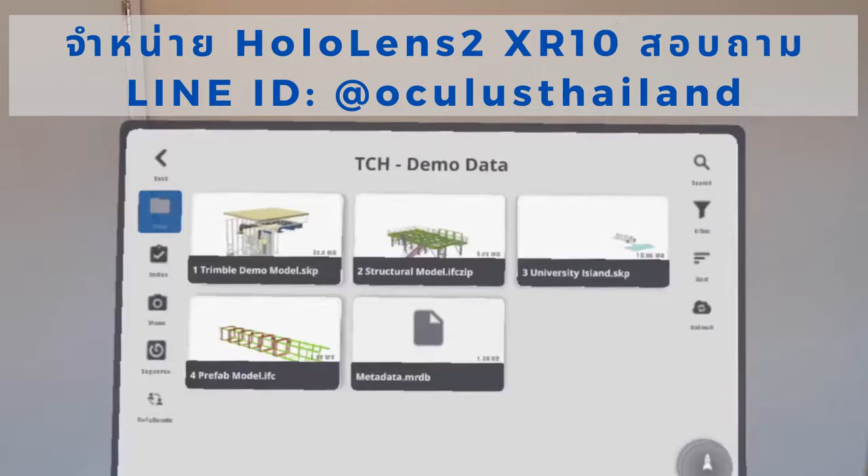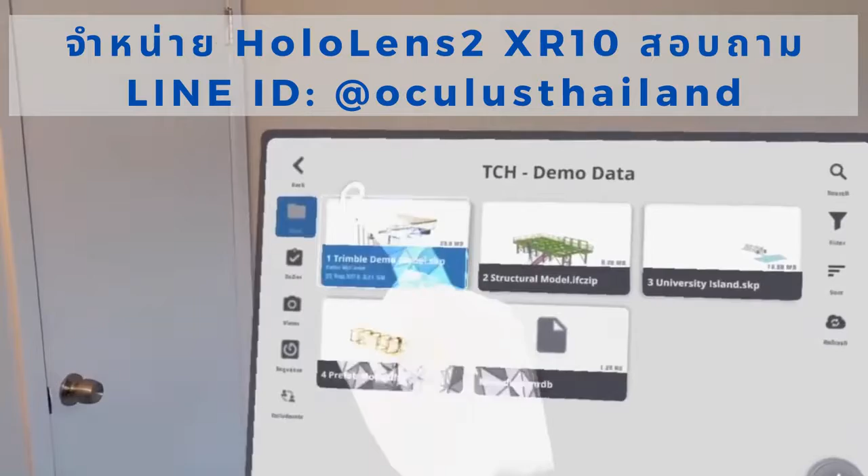Alright, so today I'm going to take a few minutes and demonstrate the Trimble XR10 headset utilizing Trimble Connect for HoloLens. To start out, within Trimble Connect, we'll select our model and launch it.

The first thing the headset will ask us to do is spatially map our surroundings, getting a good look at the walls, the floor, and the ceiling where we're standing. Then we air tap to anchor the model wherever we'd like.

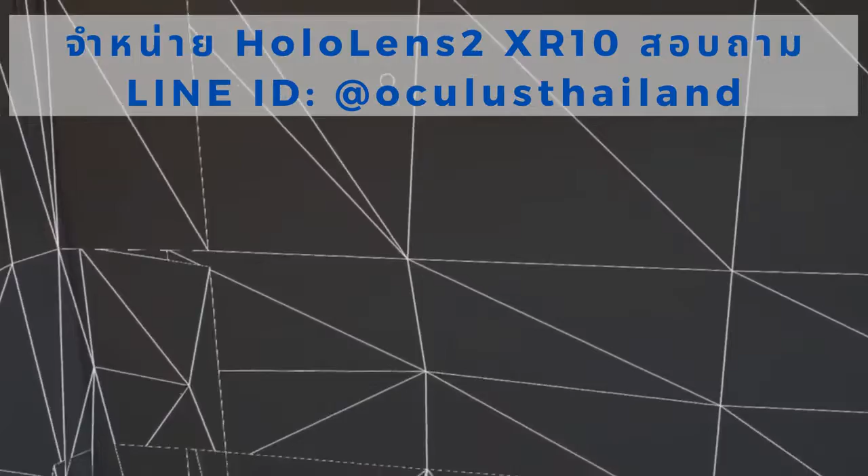I can anchor it onto the wall, but I'm going to choose to anchor it to the floor. I'll use my hand to do what we call a claw, and it will now anchor the model to the floor.

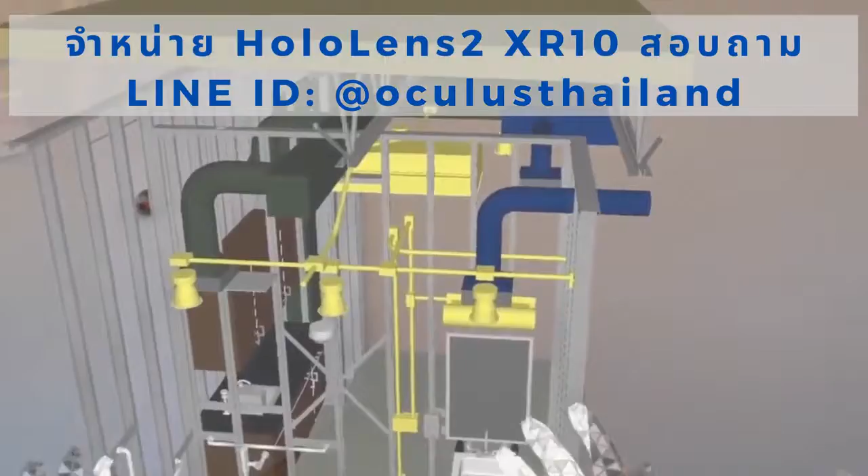Now I've got the model in front of me. I can use some hand gestures to manipulate it. I can reach to the corner and change the sizing. I can also reach and grab the orbs or spheres to rotate my model as I see fit. I can actually go right up to the model and use my hands to grab and resize it that way as well.

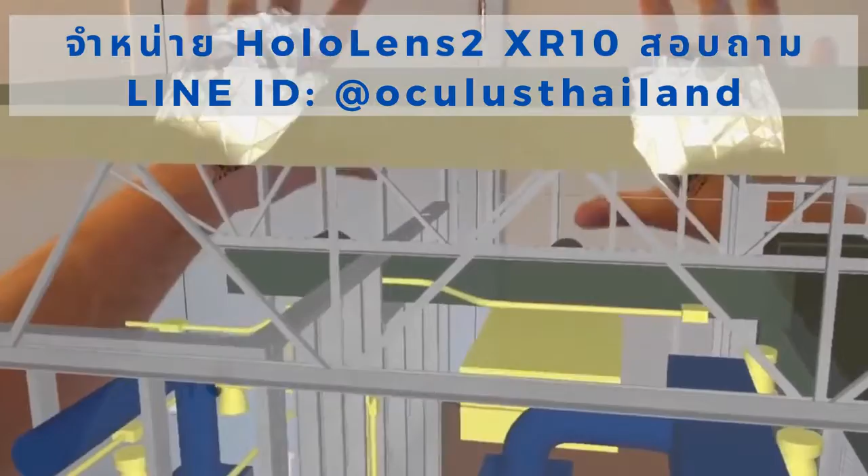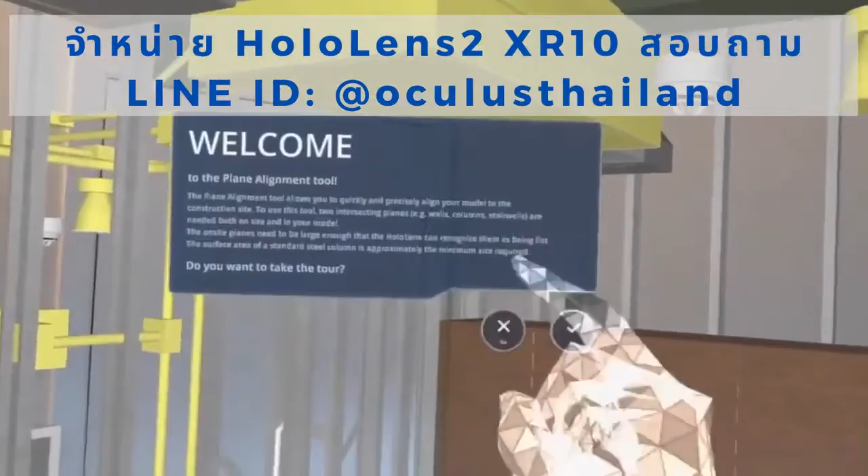Now if I want to put this model in 1:1 scale, I'll go to my menu by raising my hand, click Align, and click Align using planes. Then I'll say Connect Done or air tap to complete the spatial mapping.

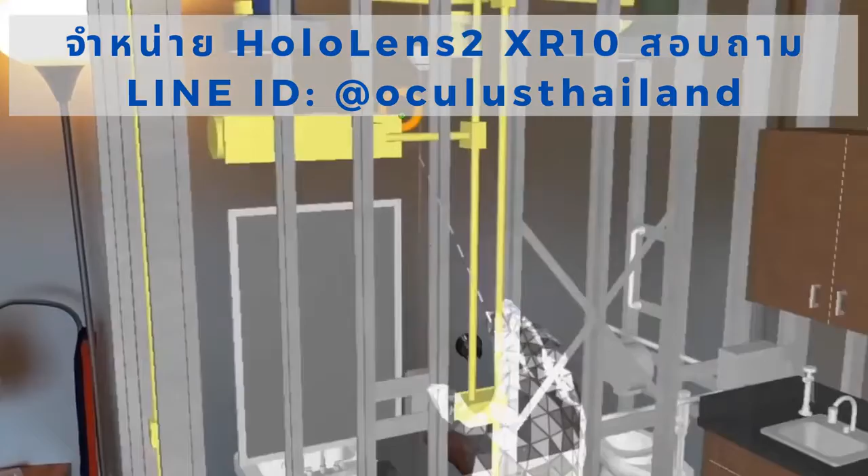Air tap on the first wall in my environment, then air tap on the corresponding wall in the model. Air tap on the second wall, same wall on the model. I'll do the same process with my second wall, tapping on the corresponding wall in the model.

The HoloLens has automatically detected the floor, so I'll say yes, use auto floors. Model aligned successfully. Now you can see that my model is aligned to my existing space, so I can see my model in 1:1 scale.

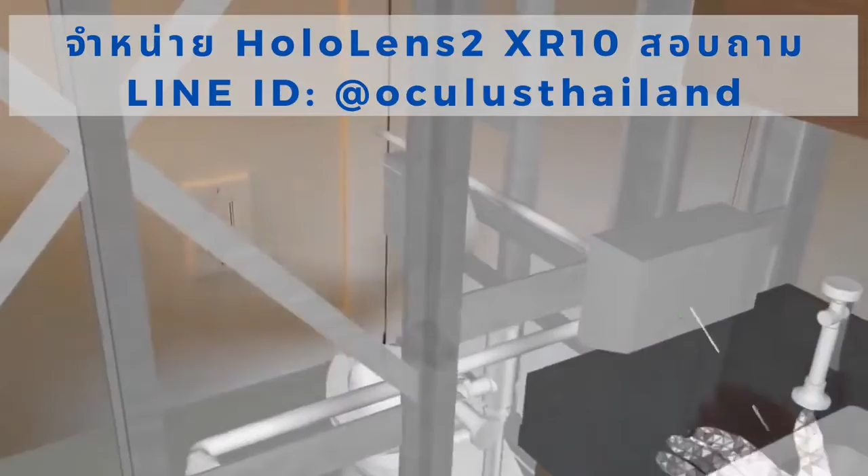You can actually see through my existing wall in my environment. You can see the opposite room there, which would be the bathroom area. If I actually open it up, I can see what that looks like on the other side, including the second room here. And on this side I have more of what would be my kitchen area with the countertop.

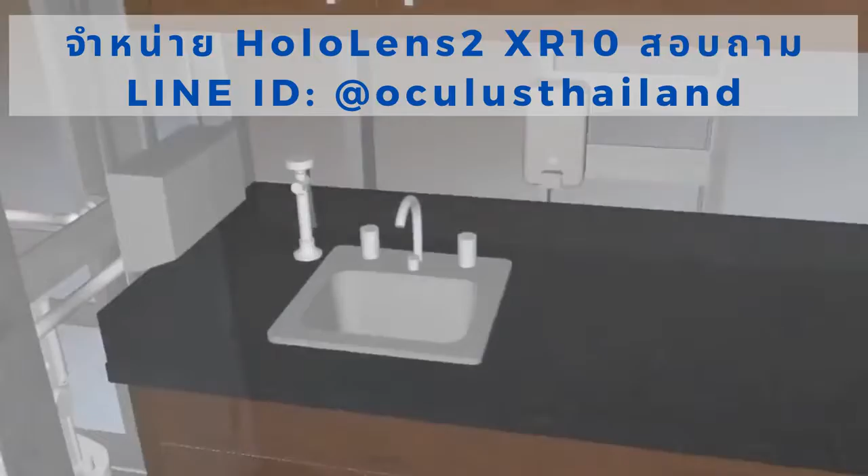So the last thing I wanted to show was doing some basic measurements. If I go to my menu again and click my measure tool, I have a few different options: I can do model to model, real to model, or real to real.

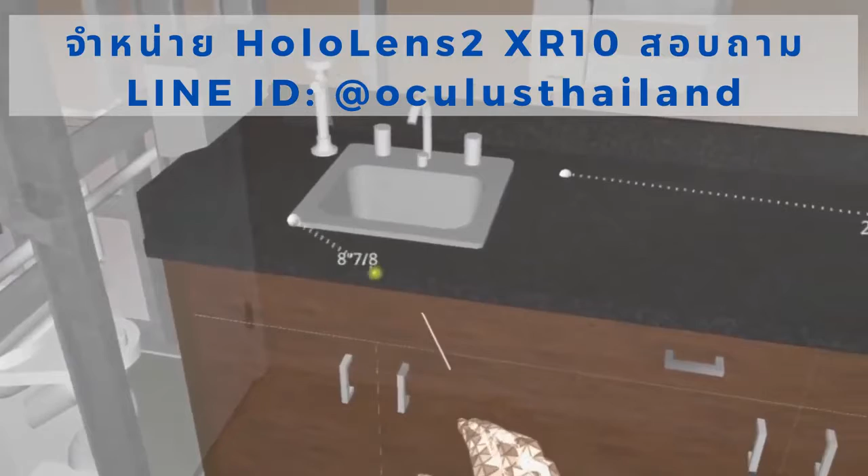Starting with model to model, I can pick a point on my countertop, for instance, and measure from there. I can get a general idea of how large the sink is. Notice it will snap to certain spots, to corners and ends of lines.

Now if I go to my menu again and switch over to real to model, this will do measurements between my real environment and my model. So if I click a spot on my ceiling, I can measure the distance from my ceiling to the top of the countertop, about 5 feet 2 inches.

I can also go into my menu, go to real, and take measurements of my existing environment, either freehand, or I can choose my 90 degree option, which will do measurements across the X, Y, or Z axes.

So for instance, I can pick a spot on my ceiling, and then I can pick anywhere on the floor, and it's going to give me a direct Z measurement from the floor to the ceiling. And you can see now I've got 8-foot ceilings in this room.